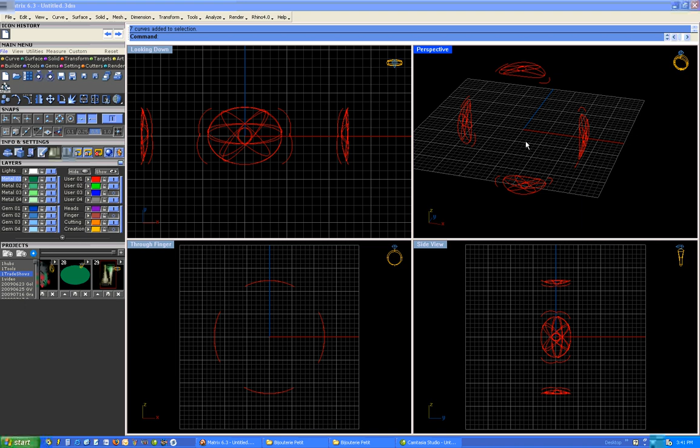This is important. Finger rail and creation rail, any curve, open or closed, can be used to do follow curve. And that means any curve that you don't want, that you inadvertently pick up, will get milled and make a mess of your model. So there's our model.

Now, the way to do this is to grab all of these and type the word group. And my fingers aren't doing too good today. There we go, group. And now I click on any one curve, I pick up the entire group. That makes it much easier to manipulate the curves once we get into the Revo Builder.

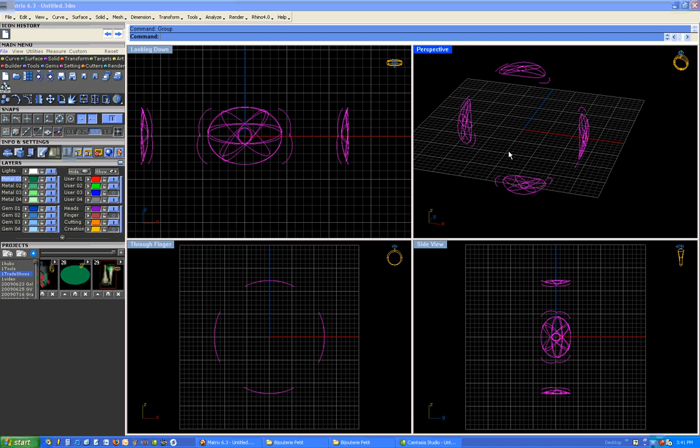So, with everything turned on, there's our model. Let's assume we're going to do this as strictly a rotary model on a tube of wax. It's in the correct orientation for doing that. So we go to our builder. We go to our Revo C Builder. It says put your model in the box. You bet. It picks up the ring rail size, which is a size 11, and we're going to do rotary.

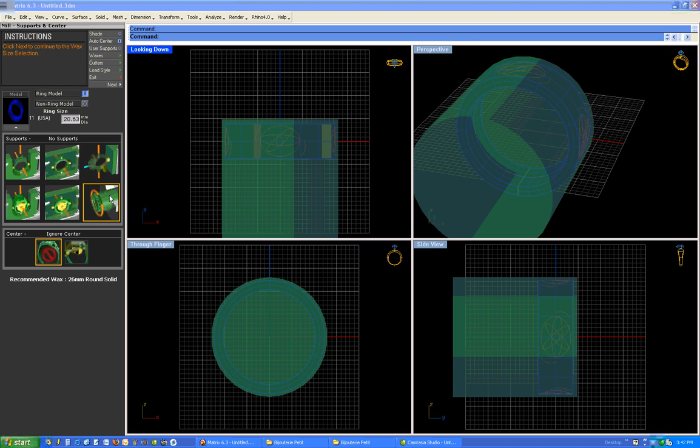Now, we have the option of either not hollowing it or hollowing it out. It doesn't matter to me. I'm going to do a non-hollow just to show you the difference. Has no effect on the follow curve function. We go next. It says we're going to do this on a 26mm solid stick. Fine. We go down here and we find our 10-degree dark blue cutter. We're going to stay at fine, and we go next.

Now, at this point, we have got our standard rotary cut. And all it's going to do is mill out around, and we're done. Now, if you wanted nice square edges, that would be the perfect way to do it. We would do that with the 032 cutter. So let's just go ahead and throw that in there. 032 black. There we are. And you have to hit set.

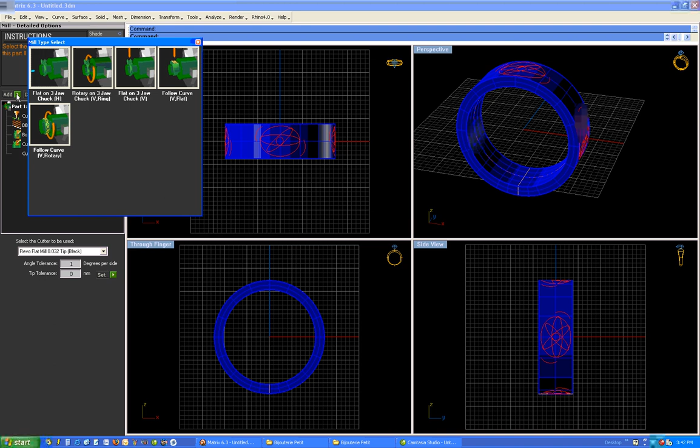Now, that's going to cut all the way around, but we don't want to engrave it with the 032 cutter because we're going to have a really big, deep hole. So we have to come up here to where it says add on this line. And we are going to see that you have flat on chuck, that's the horizontal, rotary on chuck, that's your vertical, flat on chuck vertical, that's where you can do flat work, follow curve flat, that's where you do curves on a flat surface such as a signet ring face or the side of a ring, or in this case follow curve rotary.

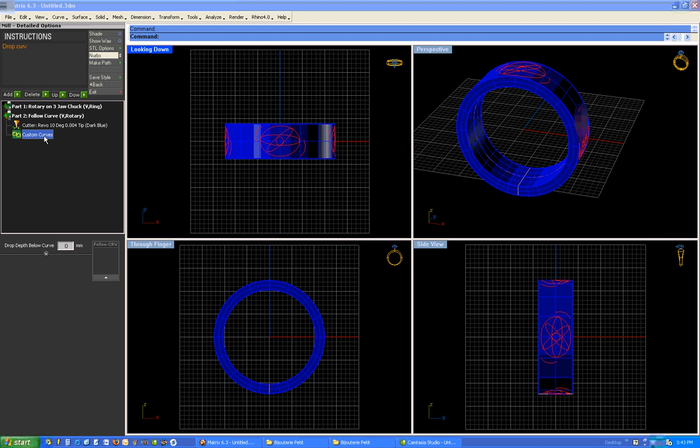Now when we punch into here, we're going to see that it says use the Revo 6 degree. I don't want to use the 6 degree. I can change to anything. We can use a dark blue. Gives you a real nice cut. And now here's where having these grouped pays off. We come up here, we grab that, and we throw those in.

Now, the current setting is drop depth below curve 0 millimeters because the curves are on the very surface of the ring. And I cut in 0 millimeters. That basically says I'm going to cut in 0 millimeters into the ring. I'm not going to get anything. A value that works out very well with a 10 degree or the 6 degree cutter is a 0.5 millimeter. So put in 0.5. Now, what I'm going to do is stop the movie, make the toolpath, come back and show you what this is all about.

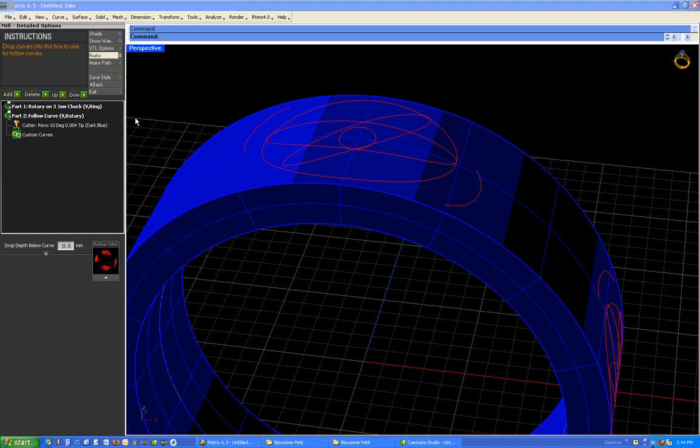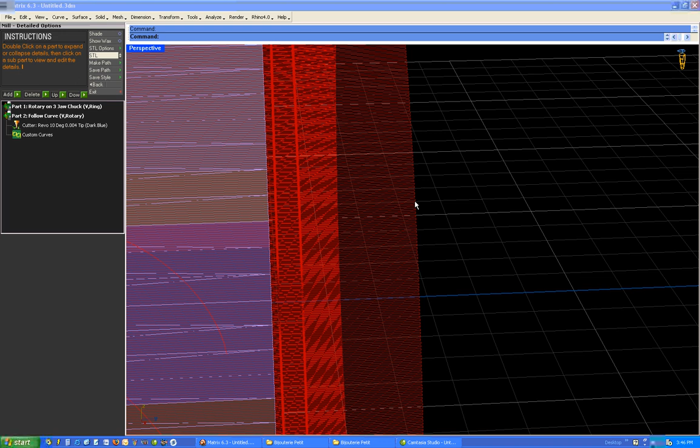Alright, that didn't take very long. Here we are. We come in here. This is the toolpath for the 032 cutter. Cutting over and back, you're going to get really nice square edges just like you designed it on the ring. And if we zoom in, you can see where it goes over, moves over a notch, comes back across. That's 0.03 of a millimeter right there. That's your step over. Okay, well, that's cool. There's your ring. It's done. Pretty. No engraving. Now we come down to follow curve.

Two things are going to happen. This is going to be a separate load part. The machine's going to stop and ask you to change to the 10 degree cutter from the 032. In other words, you're going to go from the black cutter to the dark blue cutter. Now, as you look at this, you're going to see this pinwheel looking thing, wagon spoke. The mill will come down, make a cut, withdraw, rotate, and then rotate back. That's to set the belts in the A axis for maximum accuracy so that these curves all end up right where you wanted them to be.

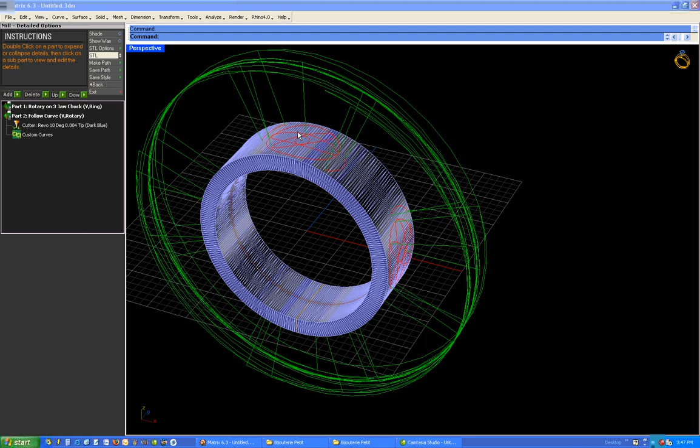If I turn off the STL, you can see there's the 0.5 millimeter deep. That's a 1/2 millimeter in Matrix space, and that's how much deeper it's going to plunge in, cut, come back out. This is a cool thing to watch. It's about 5 minutes worth of milling there, maybe 3. It's really fun to watch the machine do it because it pulls out, moves back, pushes over, goes back in. Looks kind of crazy, does a really great job.

The other thing is, when you're done milling this, you may have wax packed in those grooves. All you have to do is go back and load the second part and run it another time, and it will cut that material out a second time. Won't go any deeper, won't make the grooves any wider, but it will help remove anything that's packed in there. This works on all rotary. The auto flip flat basically behaves just exactly the same way.

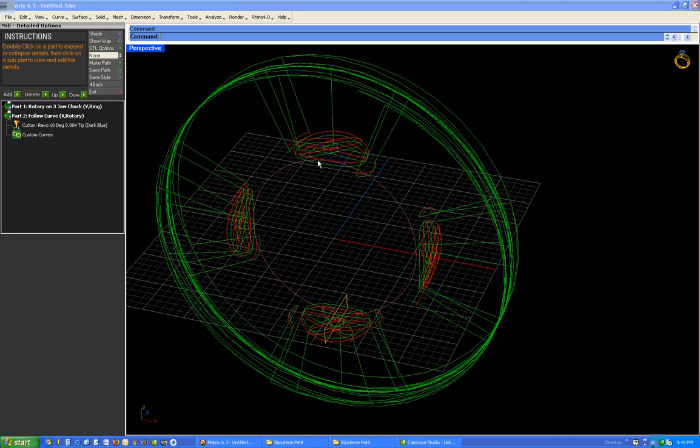Please do not get your ring rail added in as a curve. The mill will follow the ring rail and it will cut your ring in half. I have done it. Swear by it. It works every time.